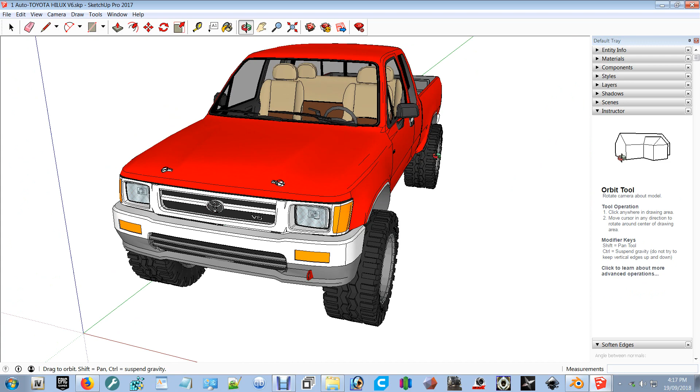See a few issues here, it's alright, I'll fix that. Bonnet pins will be gone. Yeah, no, I'm very, very happy with this model.

Alright, so we go to File, and you go to Export as a 3D model. You want to change down here as an OBJ file because it gives you more options to edit stuff. Export. And we're still editing, writing. Alright, so after that's done, just close it.

I'm going to go to Blender. Now I'm going to press N. I've already got the display up there so you can see what I'm pressing. What you mainly want to do is go up here to clip start. It should be on 10 or something, I think. You want to drag that to the left to 0.001, and same thing with this one here. You want to go as far as you want to the right.

Okay, so we go File, Import. Now, a normal Blender will go Wavefront OBJ. I've got a thing with Wavefront batch, that is, it imports multiple OBJs. So this one will work, but I always do that Wavefront batch. Now I think it was one auto. Double click on that, click.

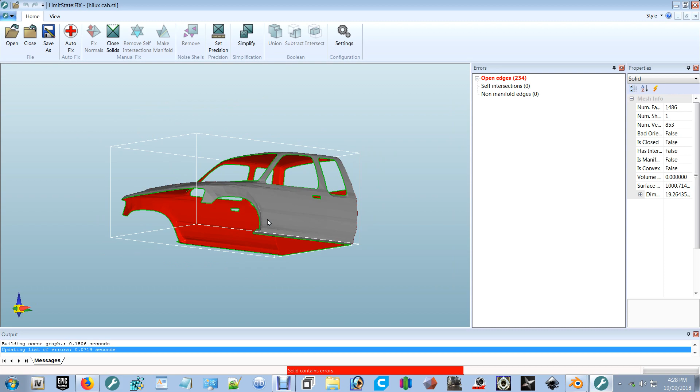There we are. So you want to open up Hilux, right? Now, without doing any work, you go to open edges. Like you can see, the red is all errors, right? Now, if I was to auto fix this, it should close everything. See how everything's closed like that.

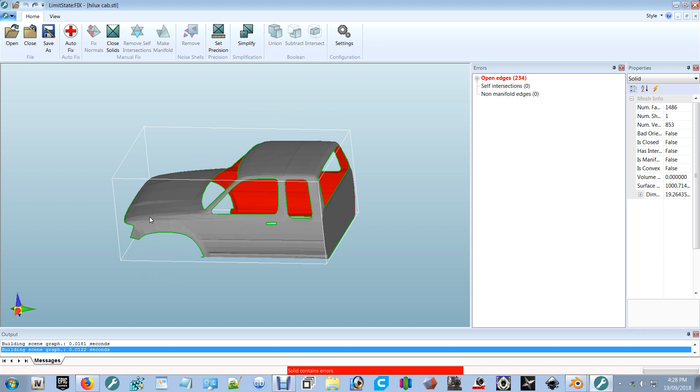So I'm going to Control Z. Well, it doesn't really matter if you press that anyway, because I'm going to fix it up. So I'm just going to close. So what you want to do now is, you've seen what happens if you go straight to the LimitState:FIX, it'll make everything close up inside the frame like that.

So you're going to click on that, make sure that that object is selected. You want to go to here, just make sure everything's fine. Yep.

Don't mind what I'm doing, that's just me messing around. I don't know why it's not doing that. There we are.

So what you want to do is go over to this spanner-looking thing over here, click on that. You want to go add modifier, and go down to solidify. Now you'll see that everything's a little bit messed up.

So again, click, I think it's this one here. Yep, click on this triangle-looking thing, just go double-sided. If it still looks messed up, you press tab, press A and then A again.

Make sure everything is selected. And you want to go... I'm trying to remember now. It's not a necessary thing to do. I think it's Control N. Yeah, it is Control N, but it's not a necessary thing to do, that's just me, okay. So yeah, exit out of tab.

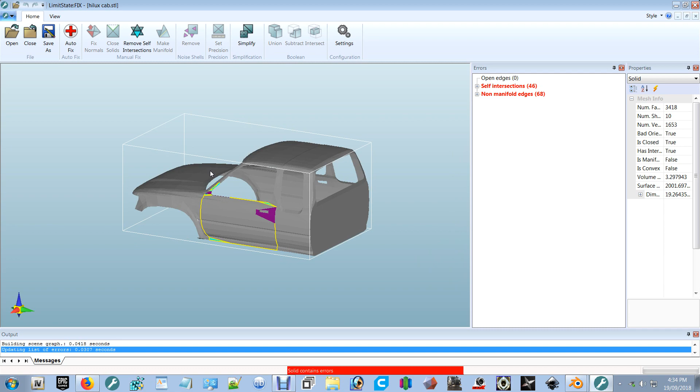Now watch the difference it makes. It will not close up - you'll have no open edges, self-intersections, and non-manifold edges. So I'm going to go auto fix. Now, as you see, it didn't close up this time.

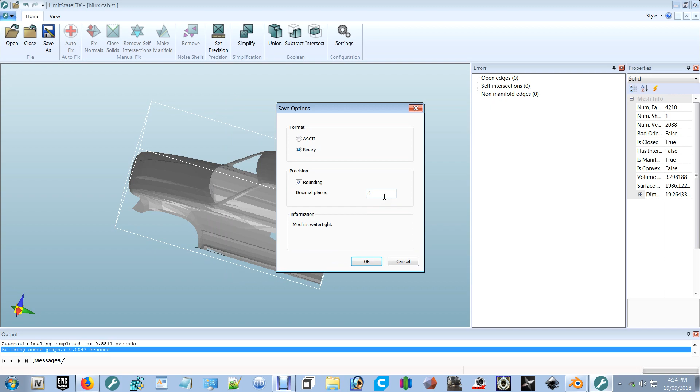So what you can do now is go save as, save it as Hilux cab. Yes. Now open up your slicer. I've got Cura there as well, but I always use S3D. I like S3D - there are updates for Cura which actually make it better than S3D, but I'm used to S3D, so that's what I use.

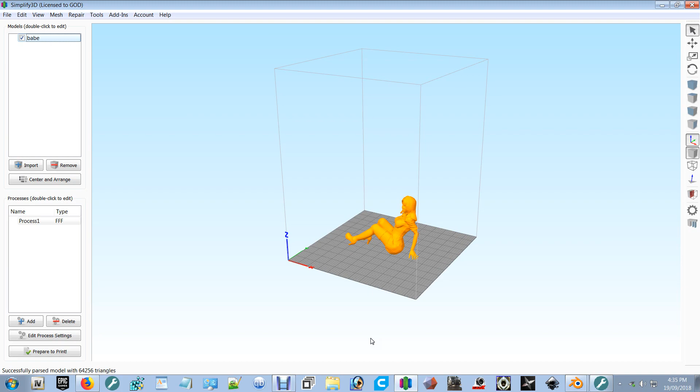And there's the last model that I wanted to do. So I'm just going to remove that. I'm going to import - we want to go to Hilux. There it is, and there's a Hilux cab.

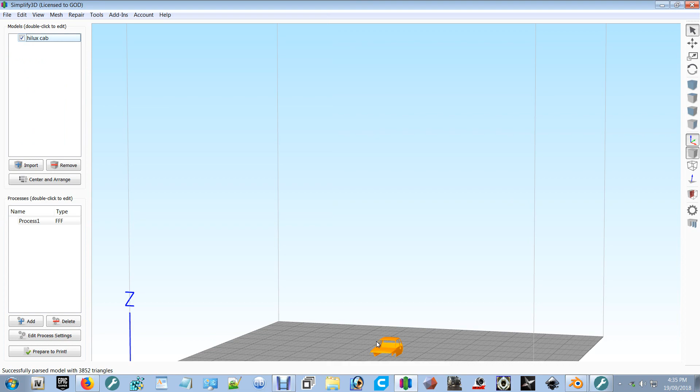Now you've got to work out how big you want that model to be. It does take a bit of fucking around with. I'm not too sure how to do it - there is a program I use called Meshmixer, which is right down here.

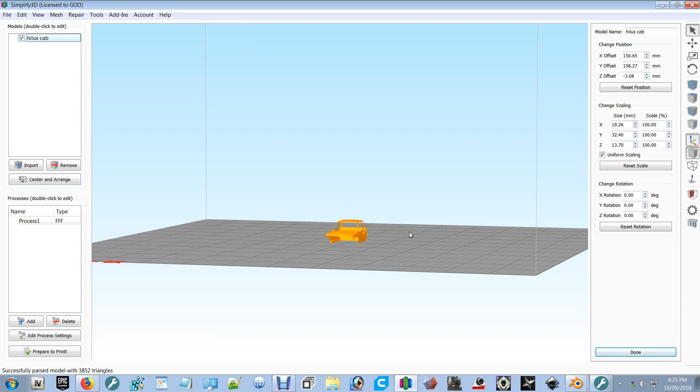Yeah, just work out how big - so like if you want the front cab to be so many centimeters long and whatever, then you add it in here. Right, so I'm just going to show you, I'm just going to go 500.

Well actually, before I do that, I'm just going to prepare to print. As you can see, it's not going to print shit but the fucking supports. So, to me, that's telling me that I need to make more solidify in Blender.

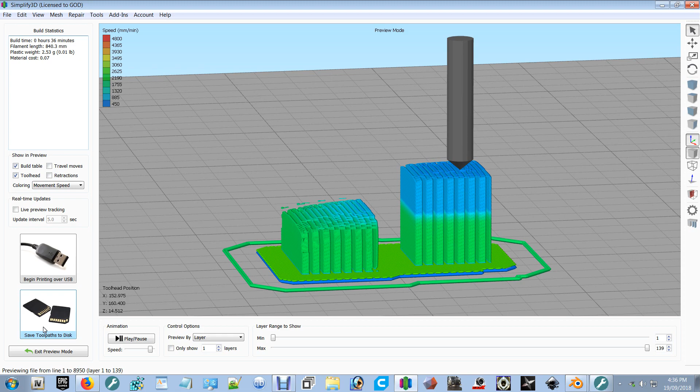Which, don't do straight away - you just save it in LimitState first. Okay, so how big is that though?

So 1/10 scale, that's only on the Y, this way. It's 32 millimeters. So I'm going to put my mic down and all that. I'm going to check something - I'm just measuring a pre-existing body that I have.

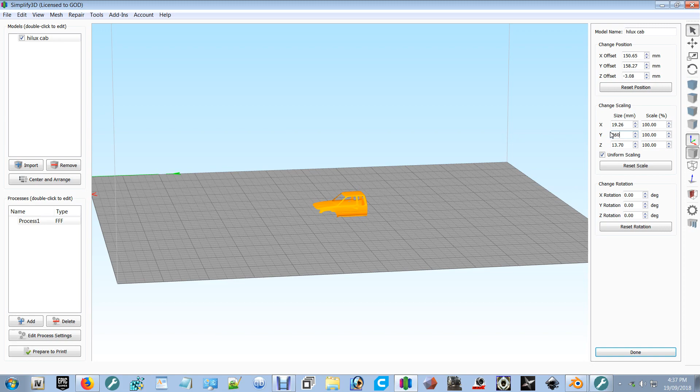For some reason it's saying that it's 26 centimeters. So I'm not - oh, that's millimeters. So I want to go 260, which is 26 centimeters. So there we go. See, that's why I said do it in parts, because that rear end, the actual tub itself, will not fit on the printer. So let's see how this looks when I prepare to print.

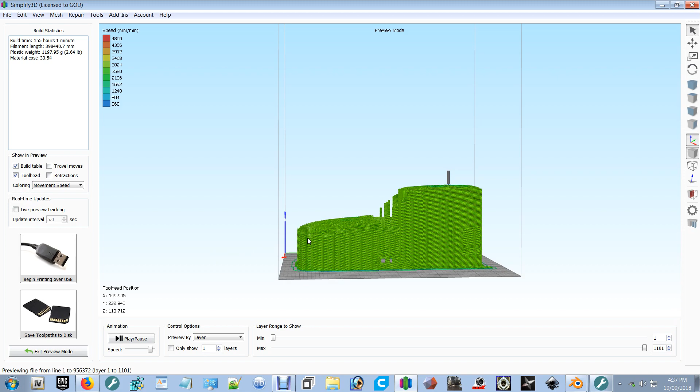It's perfect that it's not going to print right, because now I can show you how to fix the errors. You can see that it's pretty much just all supports. Alright, so what we're going to do is remove it, go back to Blender, the file that we had it in there.

So what we're going to do now is right click on that, make sure that's deleted. We're going to go to File, Import, STL this time. You want the one that we edited through LimitState. Right, now I'm not liking this look here.

So there are issues where you would need to edit this, right? I don't know what the fuck happened here, so give me a second. The fuck's happening here? Sorry guys. I hate this shift overlay shit, I think it's Control Shift Escape.

There we go. So if you do get issues like this, you might need to figure it out with Blender itself, like searching some YouTube videos.

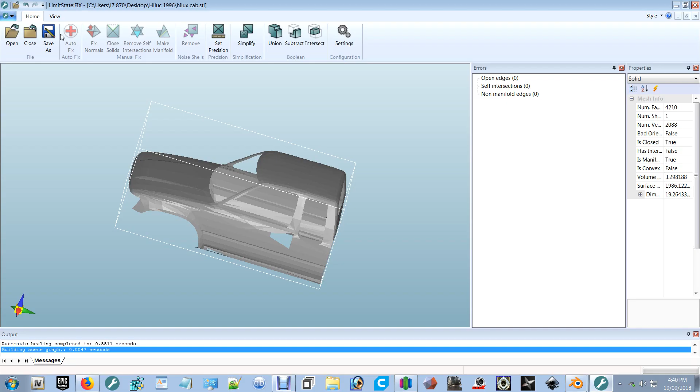So same thing, I'm going to file, export as STL. Just copy over that one. LimitState. Nope, close. Open up that file again in LimitState.

Now as you can see, the big gap there, so we're going to auto fix that. The gap is still there, but you can edit that through Blender itself. Remember, ask me questions, I can show you how it's done.

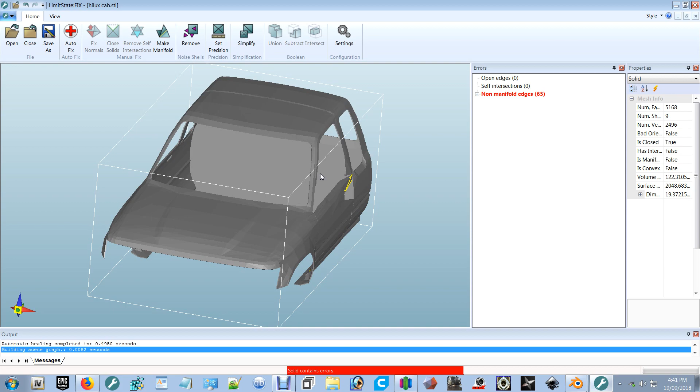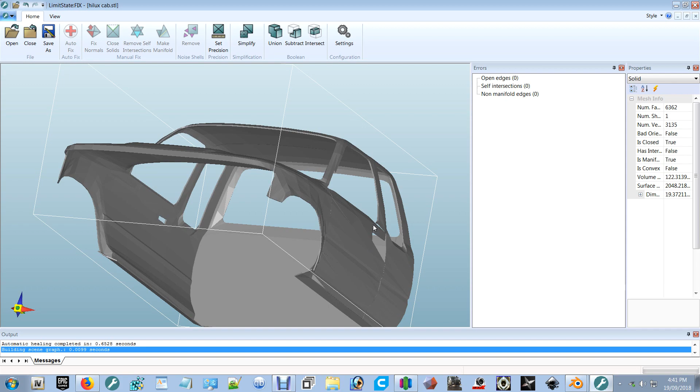And now it still says there's red there, so just watch what you're doing. Auto fix. Now sometimes it might take like 20 minutes to fix a model. So just press it and walk away from the computer. Come back, and if it still looks like it's not responding, well then quit, close, try again. That seems to fix the issue itself.

Remember, I'm not fixing that hole in the door. I'm just trying to show you how to actually print from there.

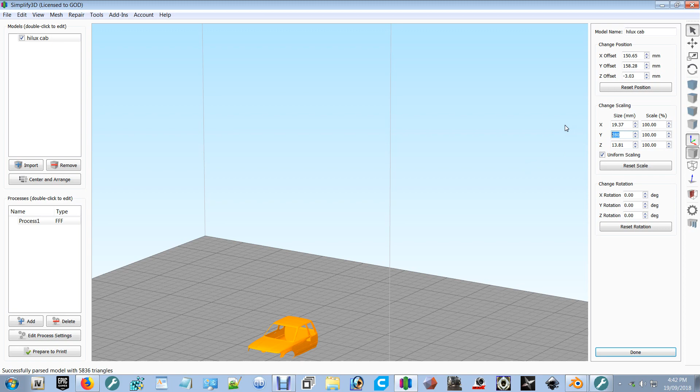So I'm going to go back here, import the STL file, because I've saved over it. And we want to go Y, I think it was 28, was it? I can't remember. Oh no, so it was 280. Might not be the right size, but yeah, just for this video.

I'm going to prepare to print. I remember last time it wouldn't print half the shit.

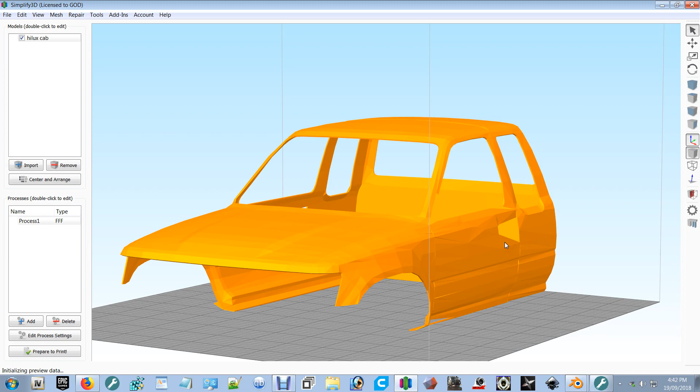Just give it a second, this is loading, it's going to be a fuckwit. Loading, you can see down the bottom here. Now sometimes it will crash and it won't show nothing, but yeah, just close it. And now, as you can see, look.

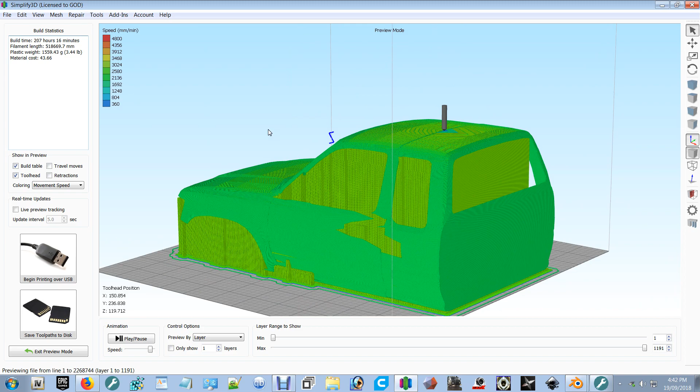Now it needs some more work, but you can always solidify that, fix that issue in Blender. But this is just the basics of how to actually make the file from 3D Warehouse printable.

So give me 1 second. Open up another one. Alright, so now that's going to take 207 hours.

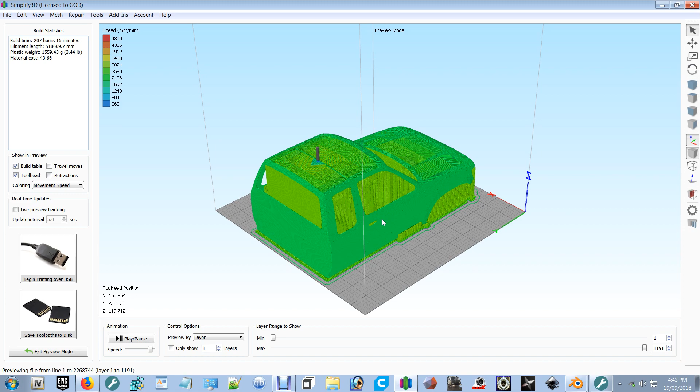That ain't happening, mate, I ain't dealing with that shit. So what you want to do is you want to exit the preview mode. And I think it's Control L. Yep, Control L will flip it onto there.

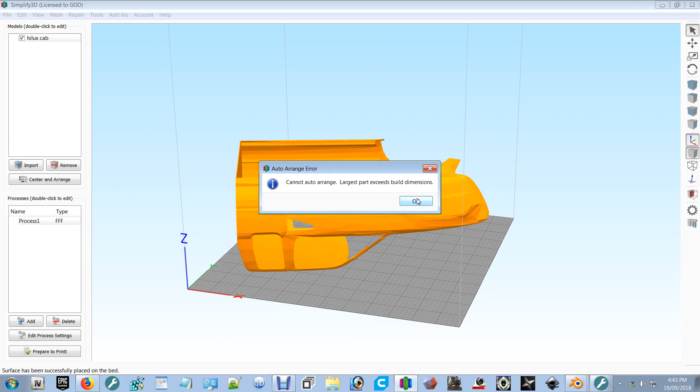And I think it's Control R, will cannot auto arrange. Control T. But yeah, as you can see, that was too big, so it's going to go down to 800 just for the video. Control R, rotate, there we go. Now that was like, I can't remember what it was, but...

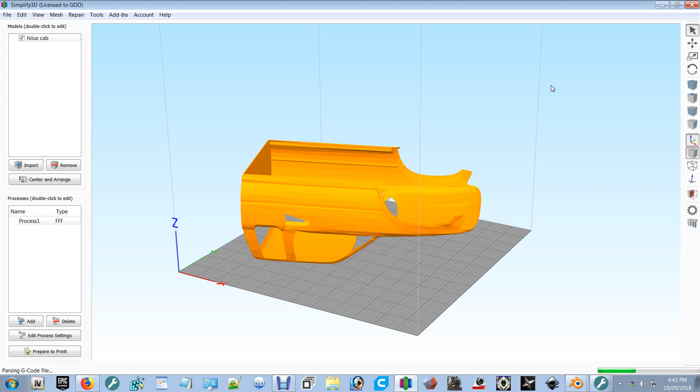Prepare to print. And I've already got another, so that's 86 hours. That ain't worth it, so go back here.

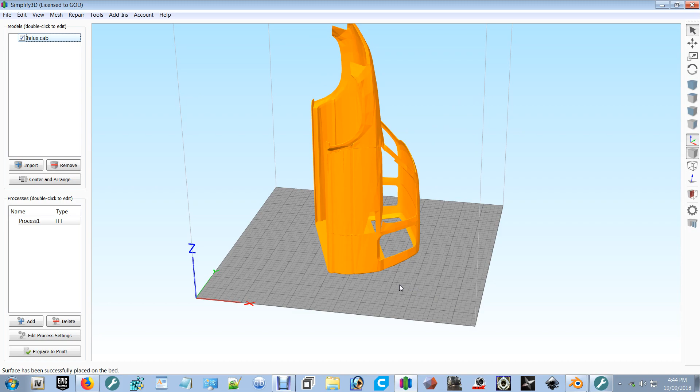I'm going to go Control L. Area, look at that. That's going to be way too big, actually, because you're going to have supports in here and actually probably up there as well. But once you actually figure out how to fine tune it properly, you shouldn't need supports for this bit here. So let's see how this is going to take.

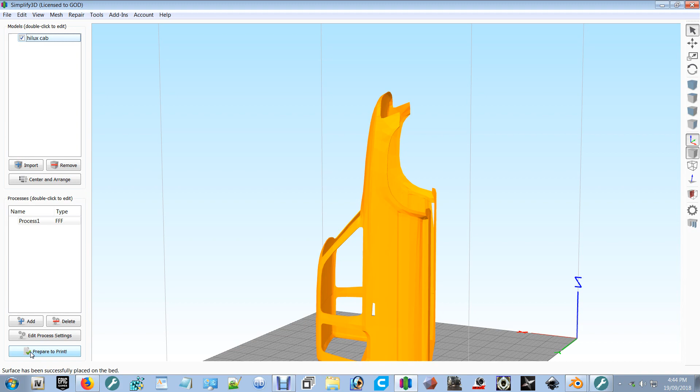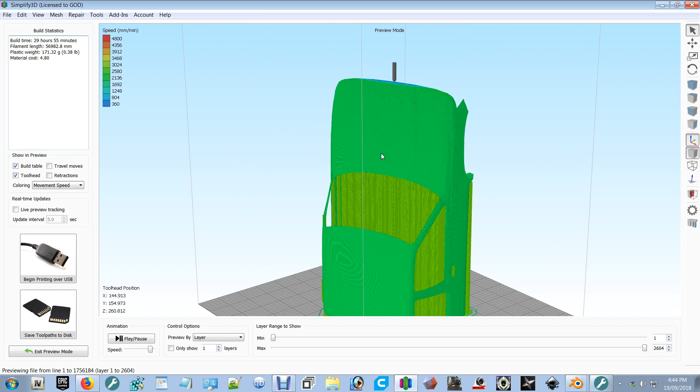There's going to be actually a few supports there, and here and here. But once you work it out, you know, you split parts here, like you could do that. That's one part, that's that STL, right?

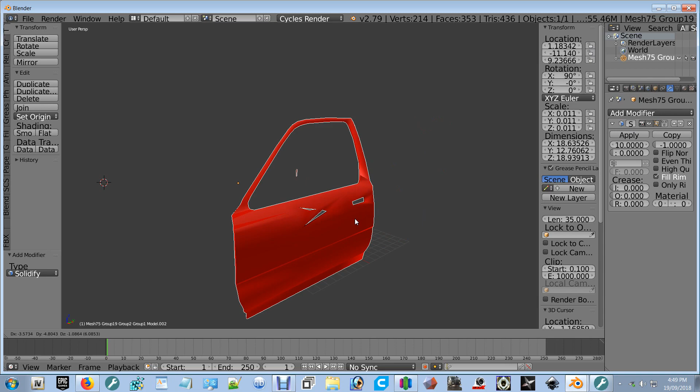There's ways to fix that, and I can show you that. So this one here, you go vertex, you go there, Control C, then it's M, no, Alt M, at center, there you go. So, Alt M at center, there you go, see?